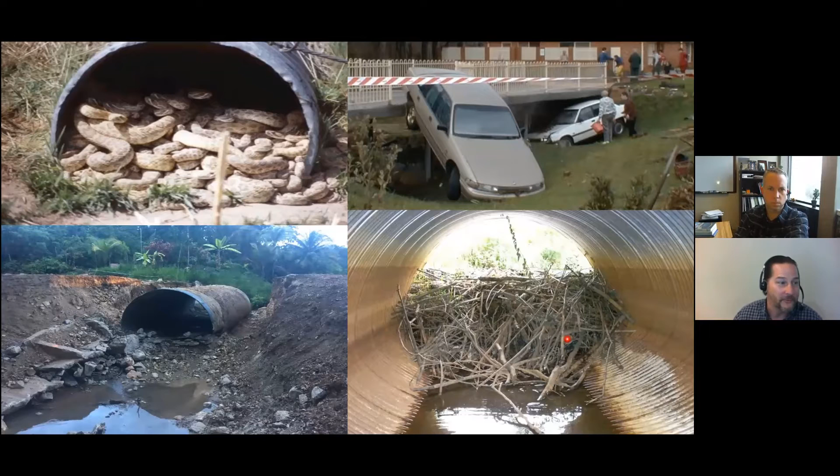I'm just going to do a brief intro to set the stage, and we'll hear about kind of two different applications of roughness coefficients. Robert focuses, I think, more on pipes and the roughness elements that can come into your pipes in all sorts of forms, sometimes unpredictable forms. How does that affect your flow, your velocities, your flow depths, your shear stresses? By picking this number that's supposed to represent how rough it is, what does that do to your hydraulics? So Robert will talk a bit about the history of Manning's equation and some of the alternatives, and then also get in more on the pipe side of things.

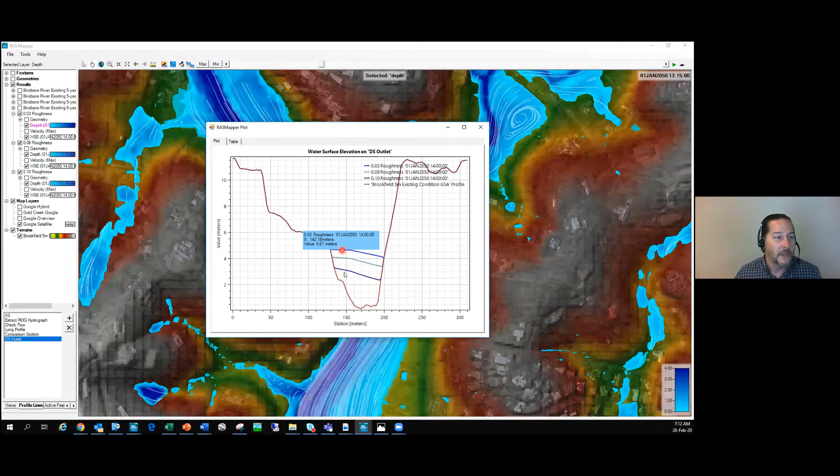And this is something that we walk through in some of our courses. Sometimes when you roughen it up, it actually sends flow the other way upstream, and you're looking at less flow. In this particular case, what I'm looking at here is a rain on grid model, a direct precip model. We've had some webinars on that in the past that you might want to have a look at. And what actually happens is as you roughen this thing up, you're slowing down the response of the watershed, of the catchment. You're attenuating your peak flows.

So my smoothest roughness coefficient actually ends up with the highest peak flow because the water barely even gets there when I roughen it way up. It gets there a lot slower and less of it gets there, and it attenuates the peak flow. So I'm actually looking at 3 different hydrological situations, not just 3 different hydraulic situations.

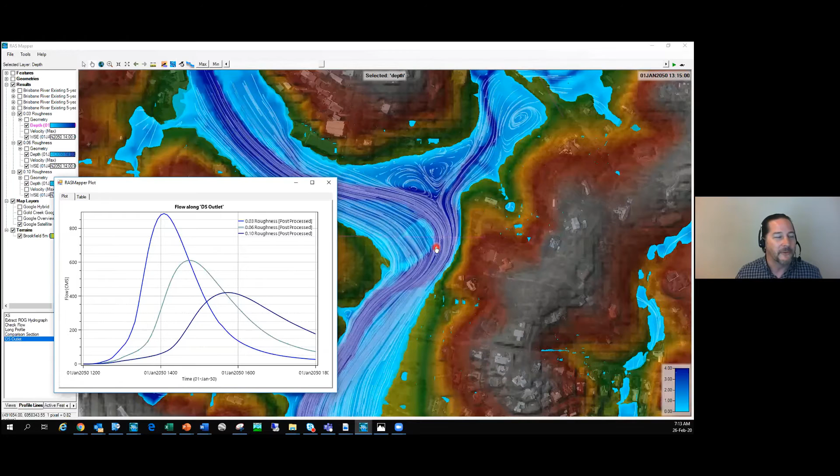So it's not always as cut and dry, as straight intuitive as we might think. It doesn't always correspond linearly that the rougher your channel is, the deeper it will be. There are other elements to consider, and I'm looking forward to hearing from the other speakers today. I'll leave it at that, turn it straight over to Robert.

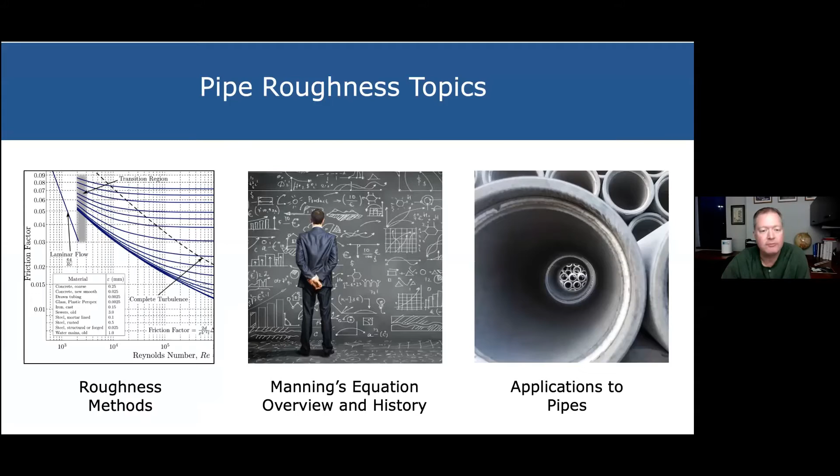All right, thanks, Craig. That's just a great example of how sometimes things in hydraulic modeling can be counterintuitive. Always good to keep that in mind. So today in my part of the talk, I'm going to cover these 3 items, talk a little bit about various roughness methods, and then dive a little bit into some details of the Manning's equation and get into some overview and history. And then I'm going to wrap up with a few specific applications to pipes. So let's just dive right in and get into a couple different methods for computing roughness.

First one I think we have to start with is the Moody diagram. This is probably the most generic and comprehensive way to represent roughness in conduits. What the Moody diagram does here is it relates a friction factor here on the y-axis to the Reynolds number going across on the x-axis. These various curves, each one essentially represents a different type of pipe material, different roughness level of pipe materials.

And then it's really probably the most accurate representation of roughness because it accounts for the roughness over various flow regimes with the Reynolds number, and also in laminar flow and in turbulent flow, all in one kind of magical diagram. Interestingly, it's not used that often in practice because it's just hard to represent this complex graph in a spreadsheet. So that's kind of interesting.

But you'll notice that all these curves, they all flatten out as we go to the right side of the graph, which means as we get into really high Reynolds numbers, really turbulent flow, which is mostly what we usually have in nature and in conduits anyway, all these curves flatten out, which gives us a real nice opportunity to simplify this process. And we're going to talk about that next with a couple of the other roughness equations.

But it's also worth noting as we move to the left side of the graph, notice that these curves, they curve up quite a bit to the left. And so I think that's just important to keep in mind that when we do some of these simplifications, it might not be a bad idea to check what your Reynolds number is, especially if you're doing a model or an application where there's some really critical thing you're designing, like perhaps a flood level that might impact millions of people or lots of property.

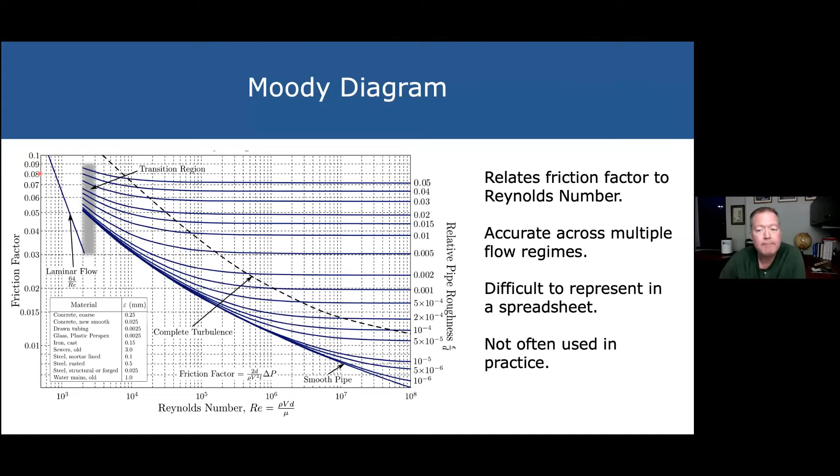Okay. Next method I want to talk about a little bit is the Hazen-Williams equation. This is one that is commonly used in practice. It's an empirical equation, a simplification of the Moody diagram and of roughness.

It was developed really to describe the flow of water in pipes, drinking water systems. It makes use of a C factor for its roughness equation. And I think because it was developed for flow of water in full pipes, it is most commonly used in water distribution systems. But it is one of those roughness equations that you will see out there in practice quite a bit because it is very easy to represent in a spreadsheet.

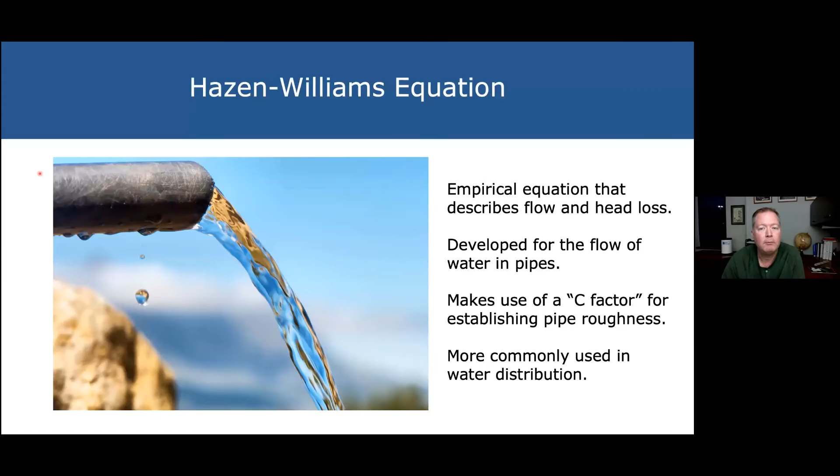And then moving right along to kind of the star equation of our webinar today, the Manning's equation. Again, it is also an empirical equation. It describes flow and head loss and friction in conduits and channels. It makes use of a Manning's N for establishing roughness.

And the opening poll question was a little bit of a joke. None of the presenters today actually knew what the Manning's N stood for, so we thought we'd put it on the webinar attendees and see if anyone had a good idea of what it was. Looks like a lot of people chose nothing, which is kind of where we were all at with it.

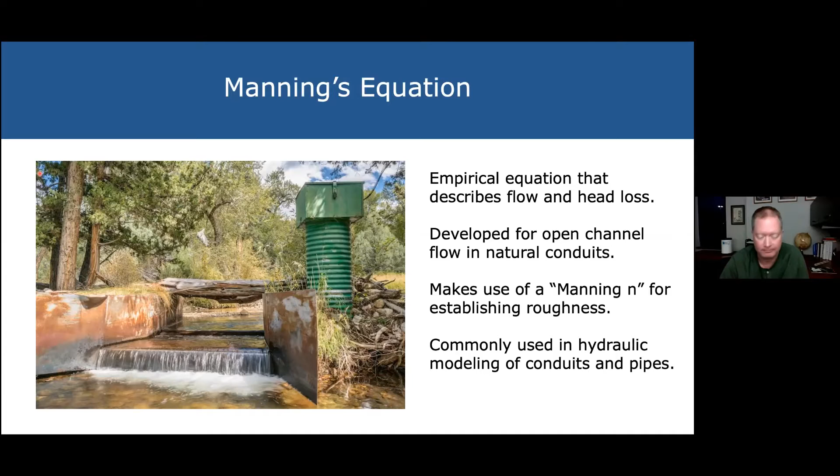But Manning's equation is commonly used in hydraulic modeling in conduits and pipes. It's very easy to represent in a spreadsheet or in a computer program, so it does have widespread use for that purpose. So with that, let's get into the details of the Manning's equation a little bit and get into Manning himself a little bit.

So I want to start with true or false, and Trevor dropped a little hint to this already in the beginning, but true or false, Manning's background was in accounting. I'll give you just a second to form your answer, probably figuring out I wouldn't be asking this question if I wasn't going to try to surprise you and tell you that this is true. Manning was not an engineer, he was an accountant.

I think this might have been one of his strengths because it let him define the simplest solution to match the data. He looked at data from many different watersheds, and he had about a half a dozen equations that he was looking at that described this dynamic. And he was looking for the simplest equation that represents them all. That led him to find the simplest solution, also sometimes known as Occam's razor. So kind of an interesting little tidbit about Manning.

Manning was born in 1816 in Normandy, France. So we're talking about a couple 100-year-old equations here. No, I don't think the N in Manning stands for Normandy, but who knows, maybe it does. He proposed the Manning equation in 1889 at the age of 73. So he was a late bloomer. I think that gives us all hope that we have an opportunity to bloom later in our careers. So there's always good things ahead, right?

There were two things that Manning did not like about his equation. One was the need to use a cube root, and you'll see that in a second when I put the equation on the screen. Back in 1889, computing cube roots was hard. There were probably tables for looking up square roots, and squaring something is easy, just multiplying it by itself. But that cube root is a tricky thing, and Manning did not like that.

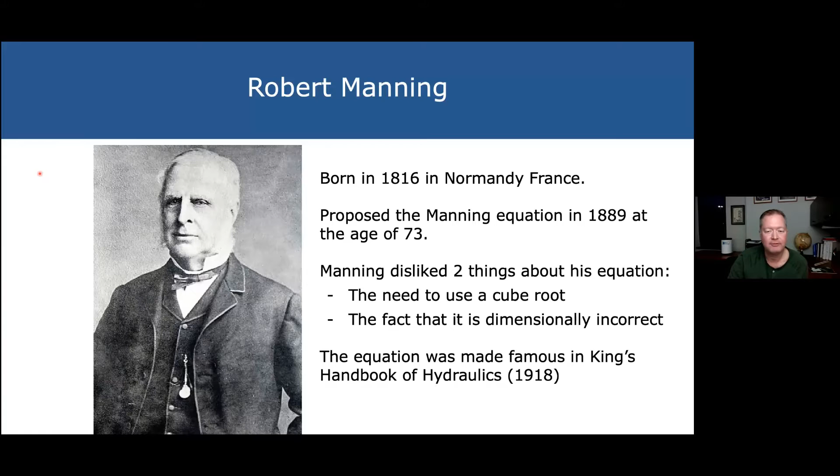And then finally, Manning's equation was made famous in King's Handbook of Hydraulics, which was first published in 1918. Note that that's almost 30 years after Manning proposed his equation. I think that just shows how slowly things can move in our practice in civil engineering. So just some interesting bits of trivia about Manning.

Now, as Cray showed us, all things aren't always equal, and modeling can get complicated, and systems are complicated. But in this case, all things being equal, a higher N in this equation, in this form, would reduce the flow.

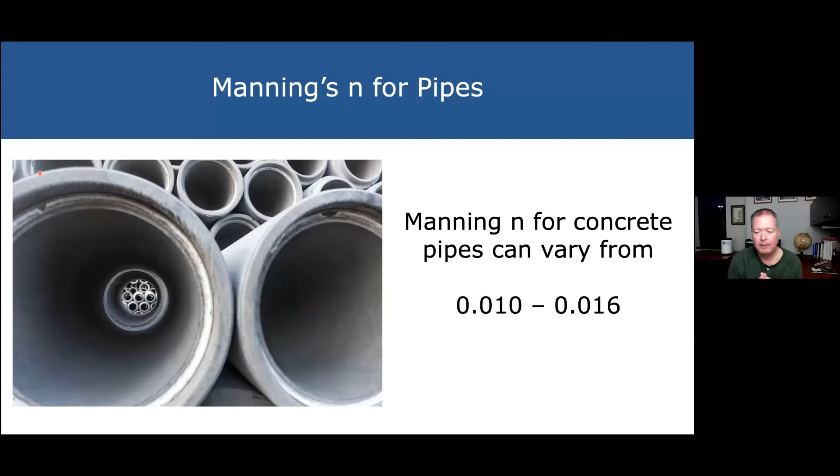So I think the pipes in the photo here are very smooth. Those would probably be on the lower side. And then rougher pipes, obviously, on the higher side. But also, in addition to the smoothness or the finishing of the pipe, I think it's important to keep in mind that Manning's equation is an empirical representation of a very complex dynamic. And part of the variation on Manning's N is just to deal with some of the uncertainties. And that's kind of a note of caution I want to offer up next.

Take the range on the Manning's N as a note of caution. The equation itself is not perfect. It's empirical. It's designed to simplify a very complex phenomenon. So just keep that in mind when you're evaluating the impacts on your engineering decisions, and maybe do some sensitivity and just be aware of the inherent variabilities in, first of all, picking the Manning's value, and next, the inherent empirical nature and variability in the equation itself. So I just wanted to give you that note of caution.

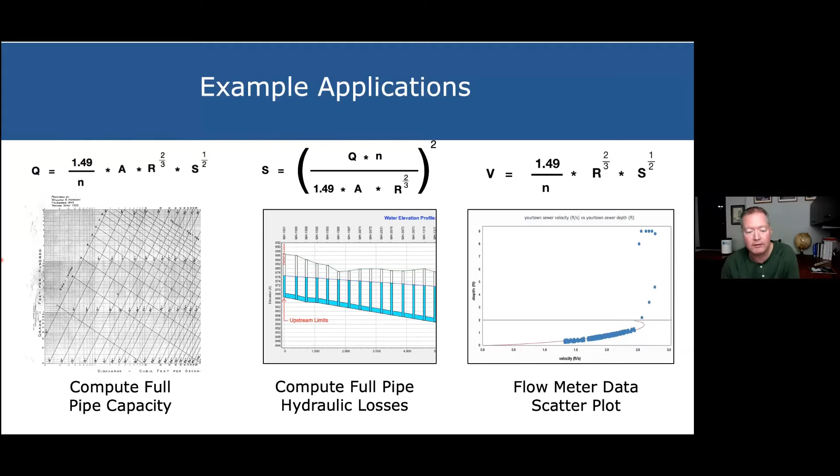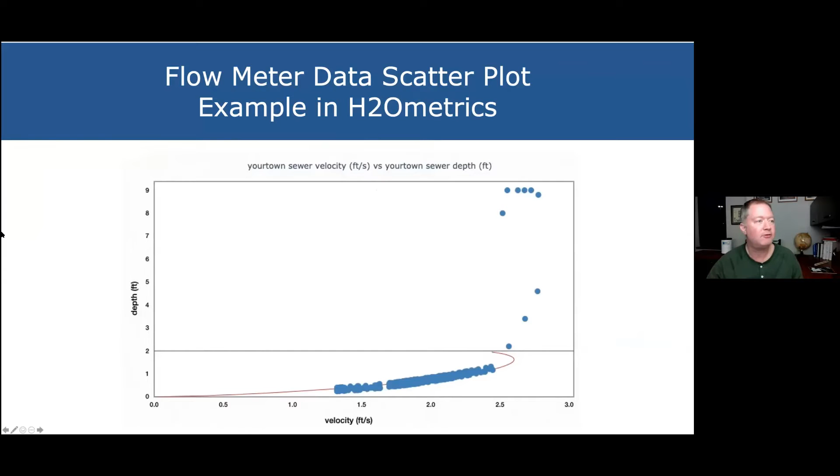But we do that, by the way, by setting the slope equal to the slope of the pipe. And then we can actually see, how does our flow metering data work? Is it making sense to the Manning's equation? And is the meter working correctly? And to illustrate that, I'm going to drop out of the PowerPoint and show some real world data for how that would work. So give me just a second here. I'm going to switch my screen sharing. Just dropped into H2Ometrics to show some actual data.

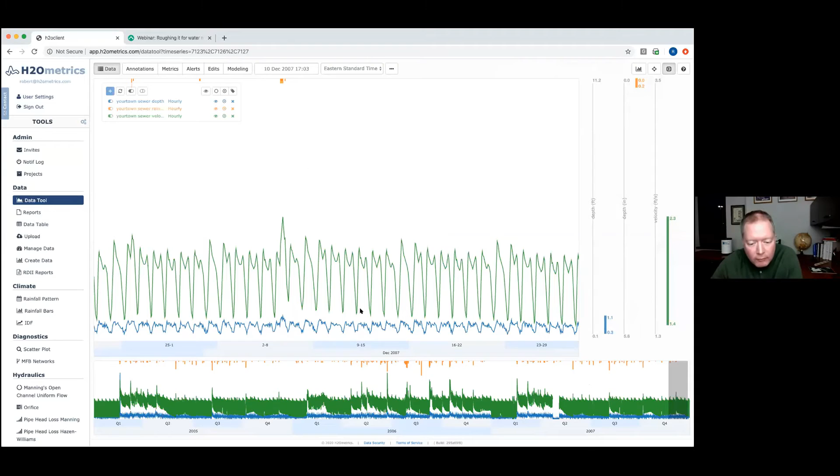What you see on the screen here in green is a velocity measurement from a sensor I was describing in a pipe, and the blue is a depth. Let me just zoom over to a section of the data here. We have a rain event. You see rain coming down from the top in orange there. The flow spikes up, the velocity spikes up, and the depth increases. If I keep zooming in, there we go. You can actually see the paired measurements. At each point in time, the sensor is making a measurement of the depth and the velocity. And notice they trend up and down together, hopefully following the dynamics of the Manning's equation.

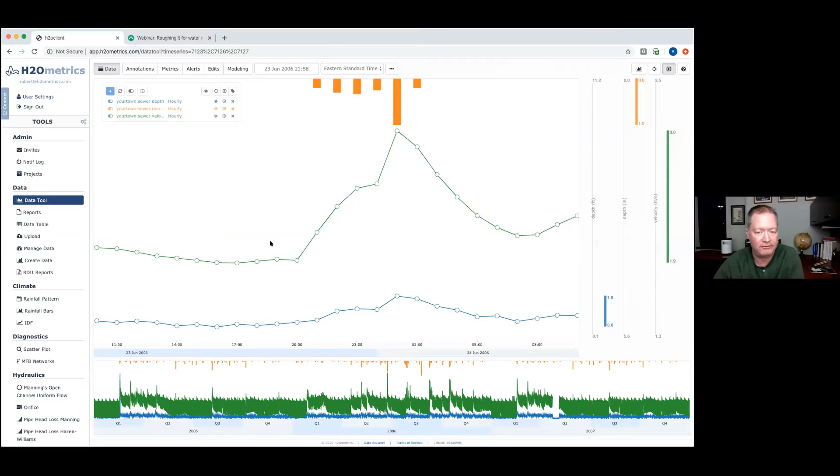But we can actually see if that's true by making a scatter plot of this data. So let me just zip over to the scatter plot tool. And now what we see on the graph here is on the x-axis, we've got that velocity plotted, and on the y-axis, the depth is plotted. In this scatter plot, each of these points is one of those measurements that I was showing before. So it's kind of a whole blob of measurement points. The black line going across the screen is kind of the top of the pipe. So I put in some parameters for this pipe, the diameter, its Manning's n, and its slope. And those parameters then can give us this Manning's curve that I described before with that equation.

The reason the Manning's curve kind of has this little squiggle and curves back in on itself, that's a function of the channel geometry. It's a round pipe. So as that pipe starts to fill up, the water starts to feel the top of the pipe and the geometry closes in on itself. And Manning's actually curves back in on itself there, which interestingly enough, for the mathematicians in the audience, means that the Manning equation is not a function. That can make it pretty tricky to solve for sometimes numerically. Just a little point there.

In this case, you can see the Manning's equation doesn't quite go through my data, but I can actually adjust my Manning's n here, kind of dial Manning's n up, going the wrong way. So let me just move Manning's n out to, magically, an n of about 0.013, which is a real classic value for concrete pipes. I get the Manning's going nicely through my data, and this kind of validates as an engineer that my metering data is making a lot of sense. This pipe is behaving under nice uniform flow conditions as described by the Manning's equation, at least for this time period I've got plotted here this month.

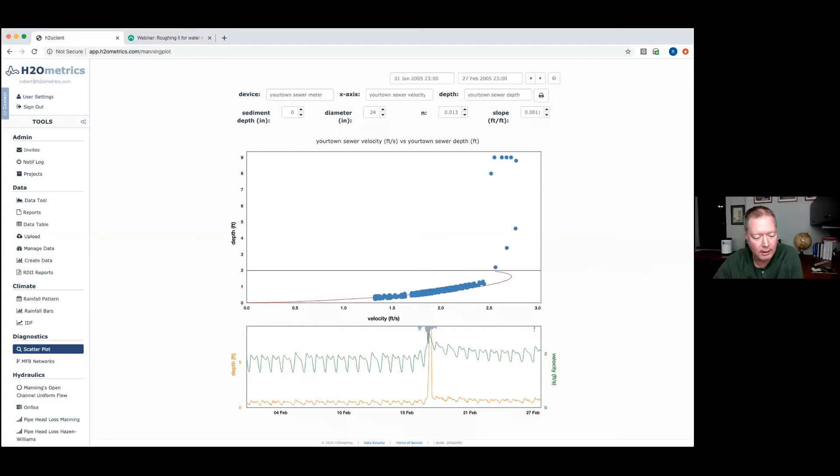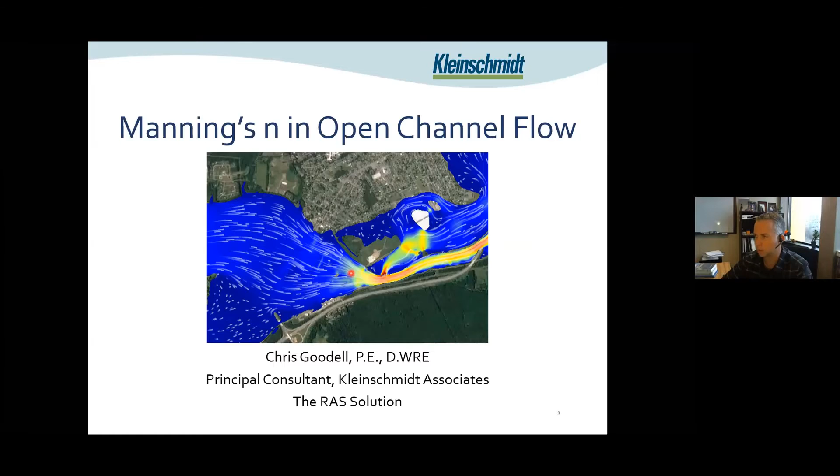So I'm going to talk specifically about Manning's N and its application in open channel flow. My background, as Trevor mentioned early on, is in HEC-RAS. And so a lot of these slides and a lot of what I'm going to talk about is kind of HEC-RAS centric, but most of these principles will be applicable to just about any kind of open channel flow modeling or analysis.

At some point going down the slope, those two forces will balance and the velocity then will remain constant. Once the friction force overcomes the force due to gravity, then they'll start to slow down. They'll decelerate. The same thing happens in rivers. The friction force is represented by the N value, and that includes things like the friction of the bed surface itself.

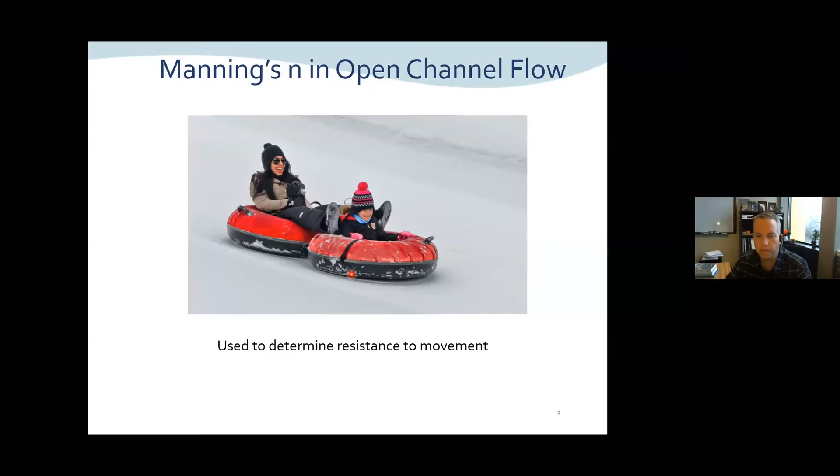In practice, though, Manning's N is commonly called an ignorance coefficient. And the reason we call it the ignorance coefficient is because that's where everything we just can't describe mathematically gets thrown, just like a junk drawer in your house. Let's say we're thinking about turbulence in our river. Well, we don't really know how to clearly account for that mathematically. Let's throw it in the Manning's N value junk drawer.

What about viscosity? Again, it's a little bit difficult to describe mathematically. Maybe our model doesn't account for that. Let's throw it in the junk drawer. So that's a lot of what we do with N value. It's kind of the catch-all parameter to account for all things that may have an impact on water moving downstream or may cause resistance to that.

But to really understand how you're going to use your Manning's N and how you're going to select your N value properly, you've got to know about the equations being used. In whatever model you're using, whatever software, or if you're doing computations by hand, it's important to know how the N value is factored into it. Right here, I've got the conservation of energy, commonly used in steady flow 1D modeling. Inside the conservation of energy, you see that there is a term to describe the head loss over here on the right-hand side.

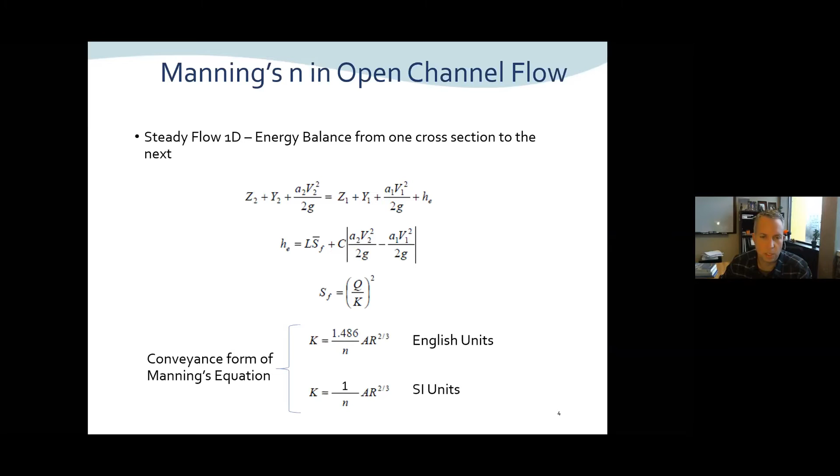Now, conveniently, in Manning's equation, if we know the conveyance of the section and we know the discharge coming in, we can actually solve for friction slope, because the ratio between discharge and conveyance is your friction slope. English units, be careful. We've got this little conversion term, 1.486, that's used. SI units, we don't need that term. So again, the friction slope or the energy loss is simply the ratio of discharge and conveyance squared.

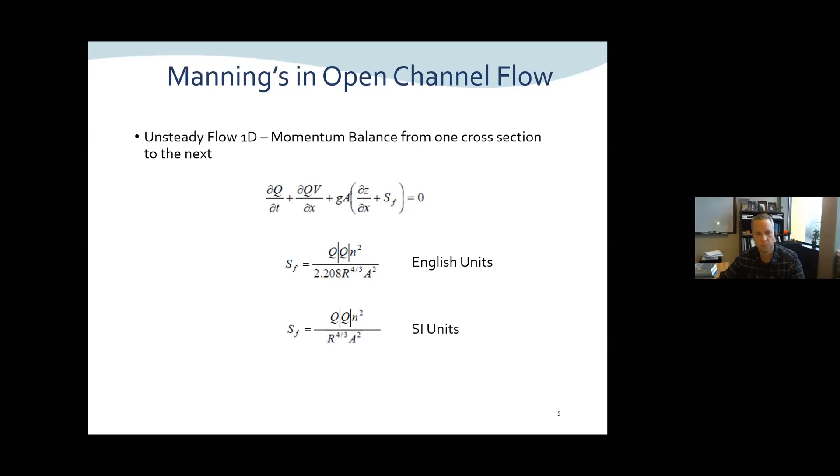The same thing is used when we go into unsteady flow modeling. The equation's different. Here we're doing a momentum balance versus an energy balance, but you can see that friction slope is still there. And the friction slope is a balance between the resistive forces and the forces pushing the water downhill. Now this is the exact same equation I had on the previous slide, it just looks a little bit different. But if you did the math or checked the numbers, you would see that the N squared over 2.208 R to the 4/3 A squared is just the inverse of conveyance squared.

Now the reason I wanted to point this out is because this has an impact on how we select our N value. Because in the previous two examples, unsteady 1D and steady 1D, we weren't accounting for eddy viscosity losses or Coriolis. And if you wanted to account for that, that would have to be wrapped into your N value. So when you're doing 1D modeling, in theory, your N value is going to be a little bit higher because it accounts for these other losses that are inherent in the equation when we're doing 2D modeling.

So just keep that in mind. When you do get into 2D modeling, you do have separate terms for eddy losses or turbulent losses and Coriolis, and so you don't need to wrap that into your N value.

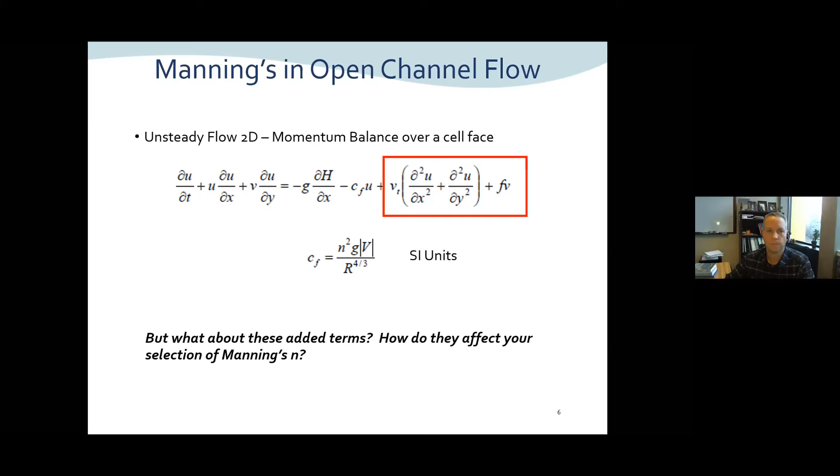So does anybody know Manning's N little secret? What's the secret of Manning's N? Well, the secret is it changes with stage. Okay, I think probably a lot of you already know that, so it's not much of a secret, but it is very important to know because as we change stage, as we change discharge in our river, the water goes up or goes down. The N value actually is different. Now, when you get to a certain depth, it will level off and approach an asymptotic value. But as you get lower and lower in stage, that N value can actually skyrocket. It can get really large. So it's important to know.

Now, when you're doing steady flow modeling and you have one discharge you're looking at, it's not that big of a deal. But when you're modeling events or maybe doing long-term simulations, then sometimes you're going to have to account for the fact that N values do change throughout. And a lot of software will give you the ability to change your N value, not only vertically, but with different discharges as well. So how do we go about selecting N values when we're building a hydraulic model?

A lot of it boils down to judgment and experience. The longer time you've spent doing hydraulic modeling, the better and better you're going to get at judgment and experience. But when you're first starting out, you're going to have to rely on other things like books and references. One of the questions on the front end of this webinar was, what book or reference do you like to use to select your N values?

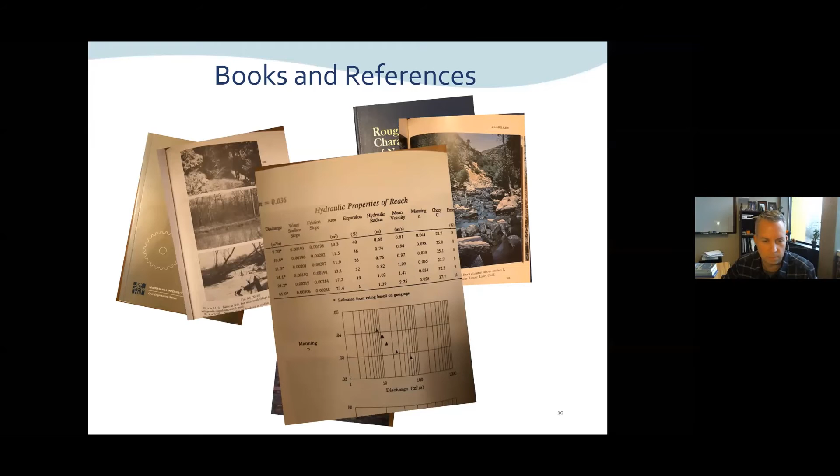And you can use that to help shape which N value or which side of this curve you want to pick your N values at. If you're looking at flood stage, then you're probably going to go with something on this end a little bit. And in fact, in some of these examples, you see these curves level off asymptotically to the high flow N value.

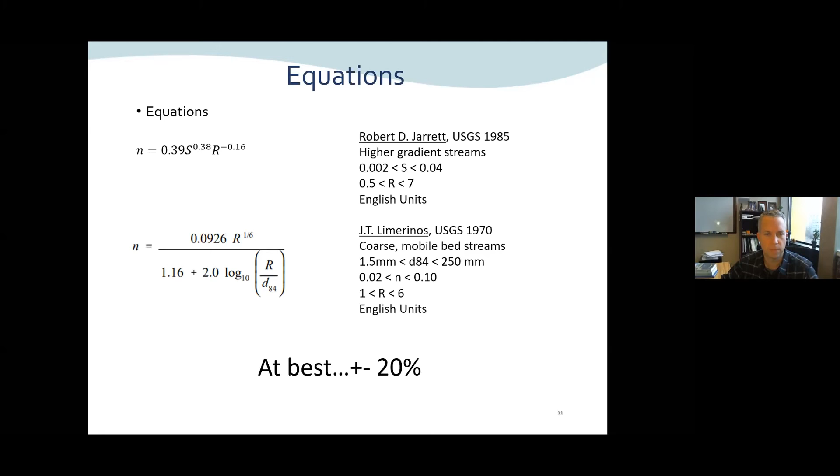I give these at best plus or minus 20% accuracy, though. So even if I get agreement between these equations, or I'm feeling pretty good about one or both of these, I'm not going to consider it any better than plus or minus 20%. And to get better than that, really the only way is to calibrate. Calibration is just the adjustment of a model's uncertain input parameters to reproduce a measured event, something you have historic observed data of. Without calibration, your model is just a simulation, as I mentioned before.

So at high flows, that's telling me if, let's say, everything else is perfectly accurate, which it's not, but let's say for the sake of argument it is, and we're just focusing on N values, then that means at the higher flows, my N values are on the low side. They need to be elevated, but at low flow, my N values are a little bit high.

Okay, and you can see the conundrum we have here, and that is our N values are going to be different depending on the amount of discharge or the stage of flow in our simulation. So in this case, we would want to have a modeling software package that allows us to vary the N value with discharge or with stage.

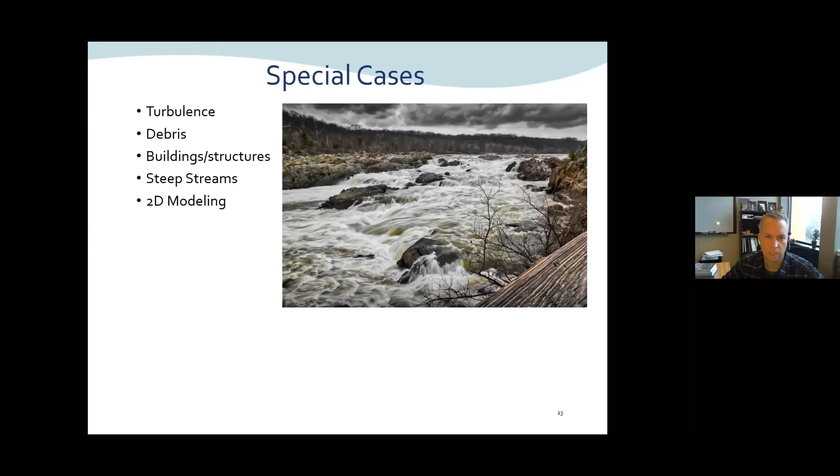What about debris? If you've ever seen a debris flow, or if you haven't seen a debris flow, I highly recommend you check it out on YouTube. They're fascinating to watch, but it's amazing to see this mixture of water and woody debris and mud all coming downstream, and you certainly wouldn't want to get in the way of it, although it doesn't move too fast typically. But all of that debris that's entrained, both in the water and floating on top of it, adds to the energy loss. And in a model like HEC-RAS, the only way to account for that is by increasing your N value.

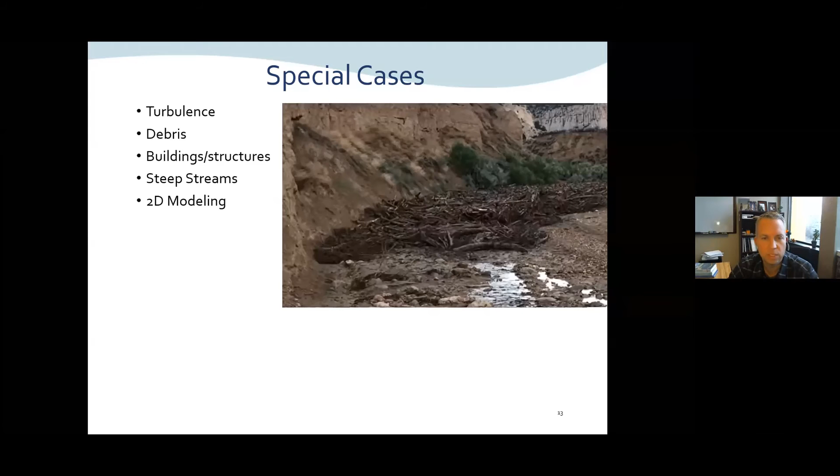And so that's a common technique in hydraulic modeling when simulating a building, where you want to account for the volume of water that's inside it, but you want to make sure the water's not moving. You have a very high N value. I've seen N values of, say, 10 or even 100 used to simulate this phenomenon.

And here we've got a steep stream. In steep streams, you typically have low stages. In fact, the stage is so low, it's on the order of magnitude of the roughness elements themselves. If you remember what Craig was talking about earlier, this gets us into what's called a sheet flow condition. Okay, now this is not classically what we might think of as sheet flow, but in theory, that's what's happening here. You've got water that's so low in depth relative to the roughness elements that the N value just skyrockets. And Jarrett's equation actually will pick this up. So that's why I like to use Jarrett's equation when I'm modeling a stream like you see right here.

And then what about 2D modeling? I mentioned this earlier, but 2D models typically will include turbulence in their equations. And so we don't need to throw that into the Manning's N junk drawer when we're doing 2D modeling. It's actually computed. So in that case, our N value may not be quite as high.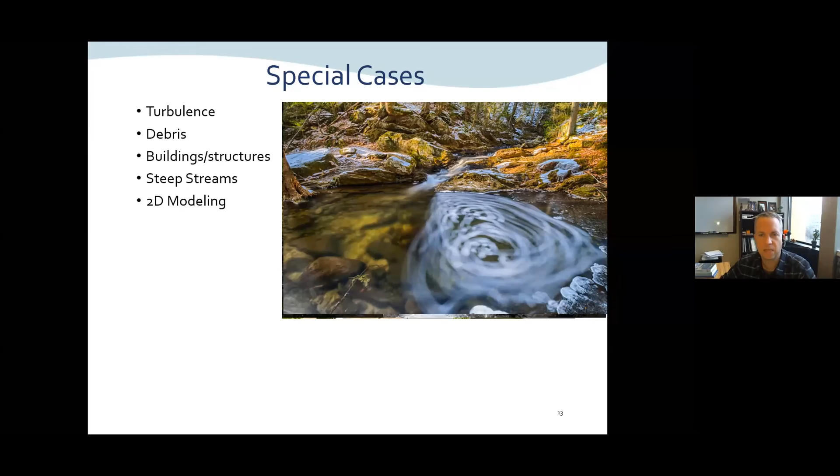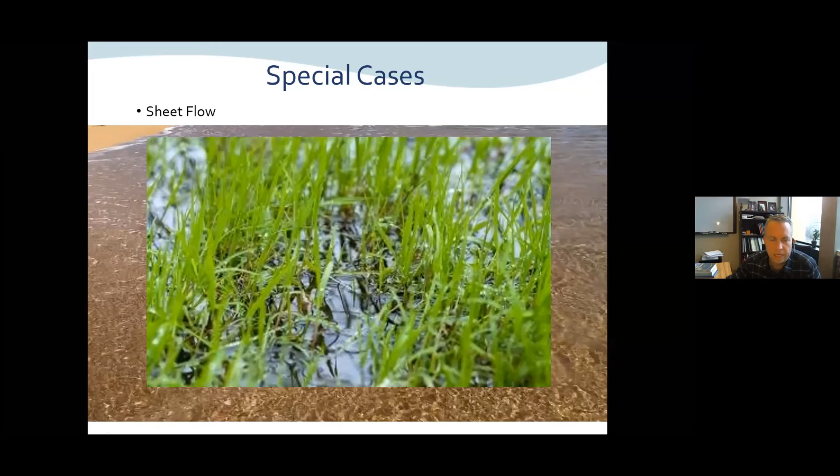Another example of sheet flow, water moving through grass. Here we see water is actually shallower than the height of the grass blades themselves. Okay, as water's moving through these grass blades in this condition, the N value is going to be extremely high. And then again, this mountain stream gives you another example of sheet flow.

And then I wouldn't be genuine if I didn't include a slide here on model stability, because this is oftentimes a reason why we may change our N values. Now, I want you to be cautious about this, because while higher N values give us higher depths, and higher depths mean more numerical stability, we shouldn't increase our N values just to achieve numerical stability. There has to be some logical reason behind it.

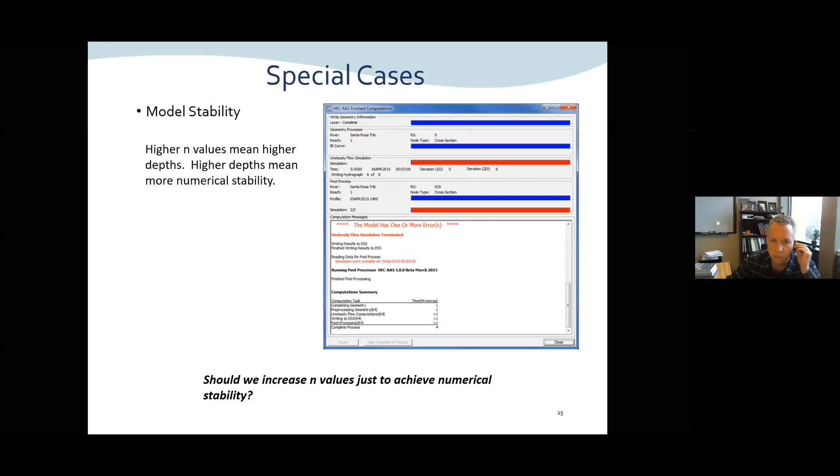Now, if we can come up with an excuse for increasing our N values, maybe there's a lot of turbulence, or you're in a steep mountain stream where you have large bed material, you can justify increasing your N value. And by doing that, you're also going to increase your model stability. So it's important to understand that.

So in dealing with N values, I want you guys to take this back with you. One is always do a sensitivity. You need to acknowledge the fact that we're not going to be exact. We don't know what the N value is. We don't know what all the roughness losses are. And so by doing a sensitivity, we can get a good idea of the range of potential results that we might have in our hydraulic model. And that will allow us to make decisions on both design, but also on anything else that you're using your model for.

Okay, calibration is very important as well. This takes it to the next level, and this allows you to fine-tune your N value based on real historic data. And then again, when talking about doing design work, you're typically going to lean to the conservative side of things. So after you do a sensitivity analysis, you can figure out what that is and how a conservative N value might affect your results.

And then finally, I always like to throw in a plug for probabilistic modeling. It's an interest of mine, but this is exactly the reason why we need to do this, because of the uncertainty with N values and other coefficients that go into our hydraulic models. Keep in mind, your model is wrong. Let's try to make it useful by using these techniques I've mentioned here.